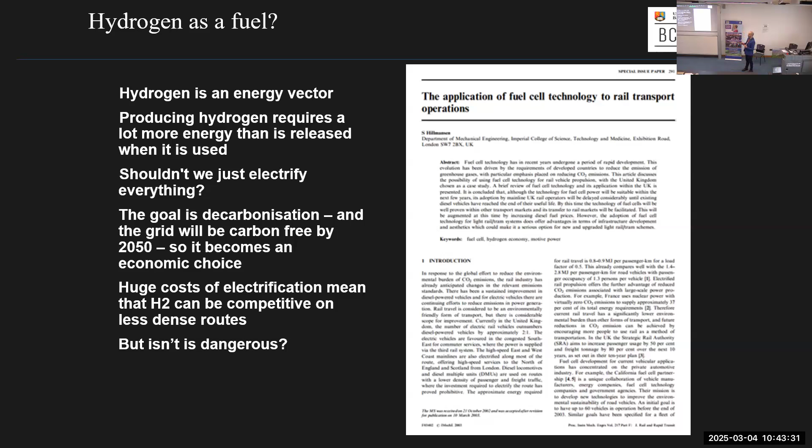I started thinking about this in early 2000, was at Imperial College, and I wrote a paper on application of fuel cell technology to rail transport, and looked at how it can be used as a fuel for railways. So as Maggie said, today is more about how we move the stuff around using freight, but our focus up until this has been using it as a fuel to power trains.

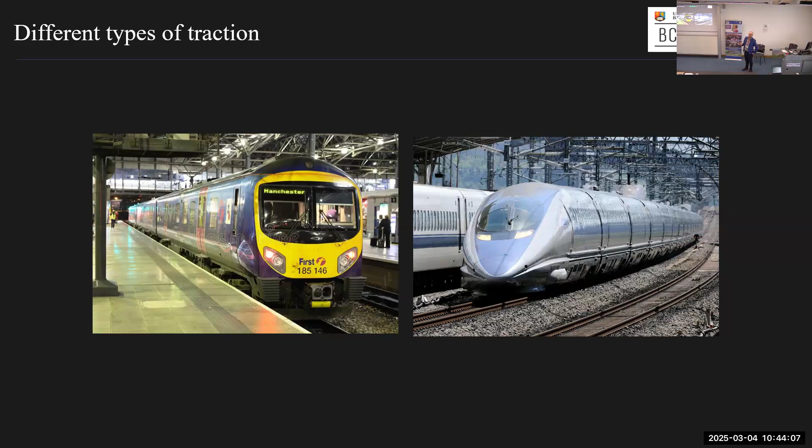There's very different types of traction on the mainline network, and freight too. I haven't got a freight picture here, but it shows a DMU style service and a high speed service. There's no way you can run high speed services using hydrogen - they're too powerful and go a long way, using too much energy. You'd end up filling the whole train with hydrogen and have no room for passengers to run at the energy levels they need. However, lighter trains with lower power duty cycles are suitable for hydrogen.

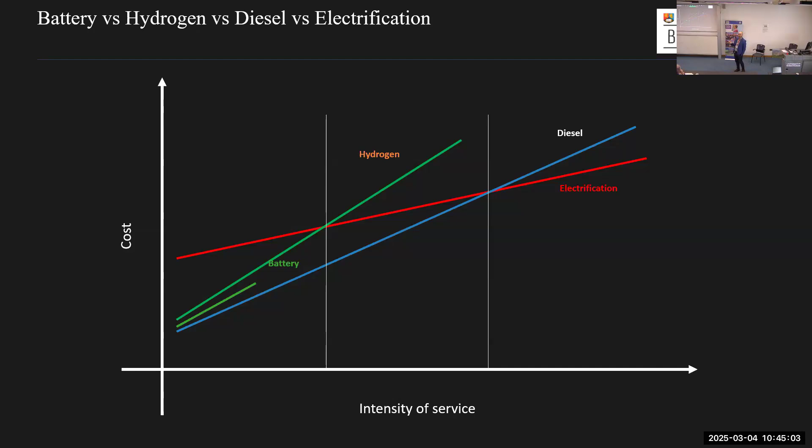I made this graph up a while ago showing where we could look at hydrogen. With the scales, this is terrible if you're a physicist - I was a physicist - there's no scales on the graph or anything. But the x-axis sort of represents intensity of service. Where you've got very intense routes, the obvious choice is competition between diesel and electrification, and electrification should be cheaper for intense services. Then at low intensity services, there's competition between diesel, battery and hydrogen, and electrification will be too expensive - you'd never justify it on economic terms. Somewhere in the middle, hydrogen can definitely get you further than the battery train, and that's where we think using hydrogen for propulsion makes sense.

Like I said, the engineering is long established, and we can move this stuff around safely, and there's a great deal of understanding about how hydrogen should be used.

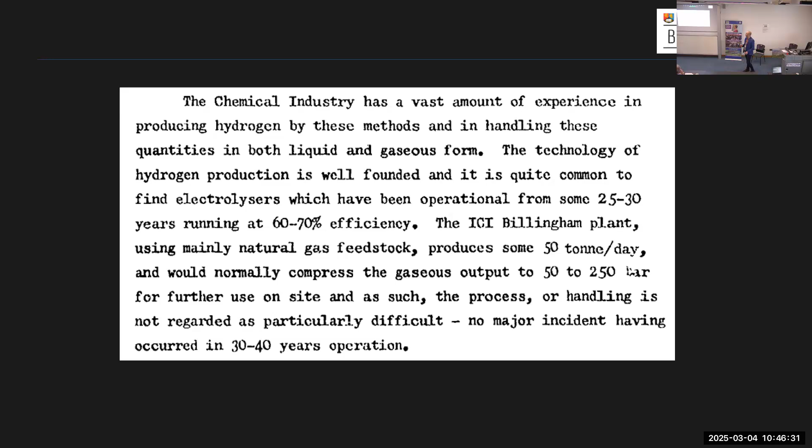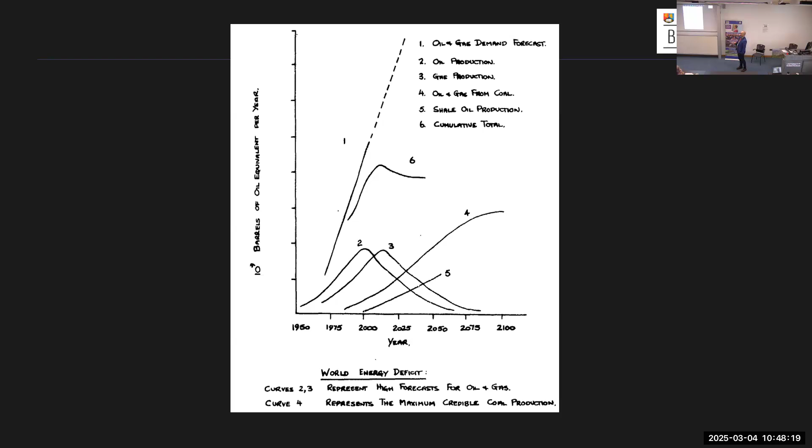I guess some sites are peaking. The sort of things you'll hear when you talk about hydrogen - some people say it's the most abundant element in the universe, that's true. Hydrogen has fantastic energy density, that's why we're considering using it for fuel - it's the thing that gets rockets into space and so on. When you can have it in liquid form particularly, it's a fantastic energy carrier, and we can make hydrogen through a range of means, including by us - there's a hydrogen test you can do on your breath, if there's a certain medical condition, I think it might be lactose intolerance or something.

If you're lactose intolerant, you have little bacteria in your gut which belch out hydrogen, so you can detect it. We produce hydrogen as well, but not very much of it.

There's a volume problem with hydrogen because it is very light as a gas. 1 kilogram of it at standard temperature and pressure would take up about 10 cubic meters. So it's about 1/10 the density of air, and even in liquid form, it's about 1/10 the density of water or thereabouts. So we have a volume issue, not a mass issue.

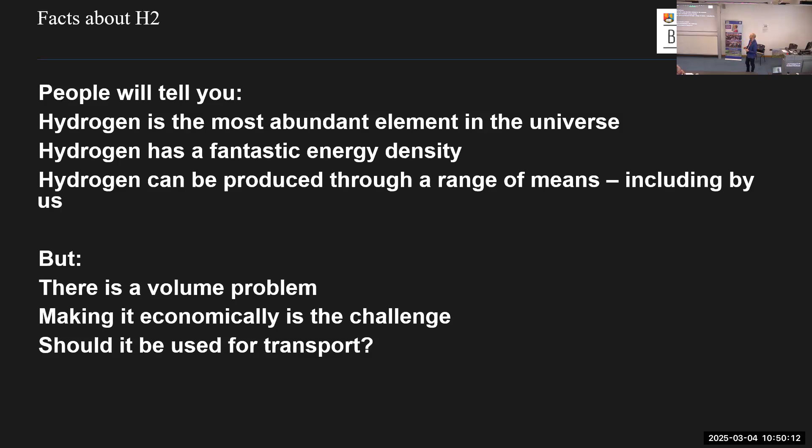Making it economically is a challenge here. Some people say if you're producing hydrogen in a green way, should you use it for transport? But this is maybe where the rail freight industry comes in, because you don't really care what your customers are using the hydrogen for. If it's going into making more effective use of steel or something in the steel process, then that's okay as well.

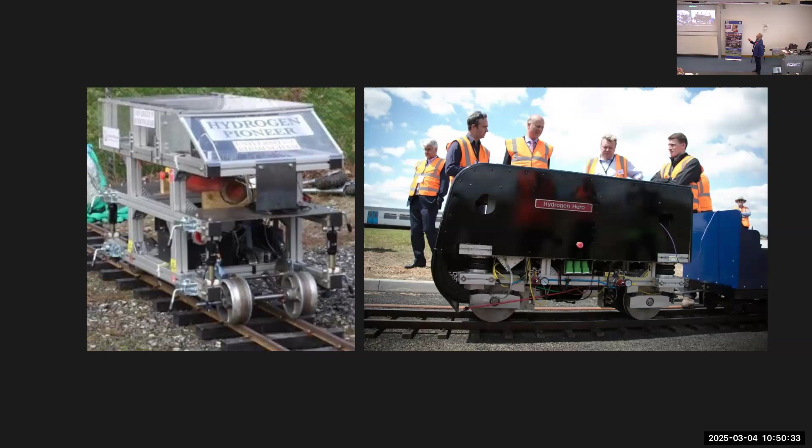So when we've looked into this, we've done some projects on hydrogen trains. That was me when I had more hair, with the Secretary of State for Transport, about 3 or 4 years ago. That's Chris Grayling, and we introduced the Hydrogen Hero train to him.

That led on to the work we've done with Porterbrook. I'm sure you know about this, and Helen's here as well—she's going to speak later about barriers to the introduction of hydrogen. What we did for that was strip out the motor car and put all the equipment inside the motor car to demonstrate that it would work. So it's evolved since then.

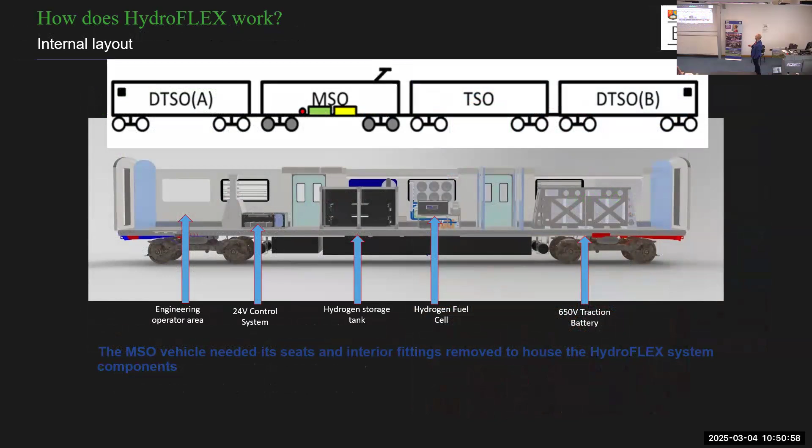We ran to Evesham and back, and since then the second version of Hydroflex runs around the network a lot. It's code number 799001, I think. If you Google it, there's loads of YouTube clips of it running about without using pantograph.

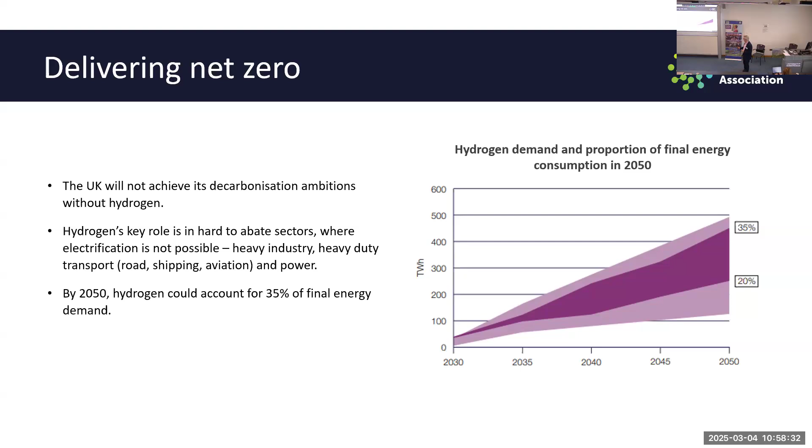As I mentioned, it can be used in a whole range of industries - steel making, chemical production, and even fuel production. The aviation sector and the marine sector are looking at sustainable aviation fuels, and hydrogen is a key feedstock to production of sustainable aviation fuels. Equally, the marine sector are looking at things like green ammonia and green methanol, and hydrogen is a feedstock to producing those kinds of fuels. Steel making as well, hydrogen has a key role to play, and as you'll see later on, in power generation too. Also it's produced in industrial heat applications, so there's a number of applications.

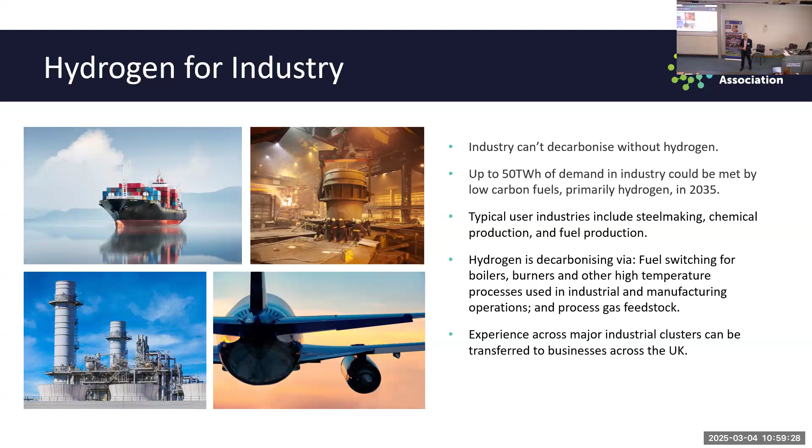There are a number of projects active in the UK at the moment where they're looking at switching from natural gas to hydrogen for industrial heat - in cement manufacture, in asphalt production, and even whiskey distilleries in Scotland.

Hydrogen also has a role in power generation in terms of producing and delivering energy resilience. As we put more and more renewables onto the system, those renewables are intermittent, so we need something to balance and manage that intermittency.

One of the good things often talked about is you could use excess renewable power to produce hydrogen and store it. It's a good long-term storage solution. Battery technology is equally advancing, but the thing about hydrogen is once you store it, you can store it for months or years, potentially as compressed gas.

You can see from the slide that it's common for renewables to get curtailed. That costs money, and that money ends up with electricity and power consumers paying. Hydrogen potentially offers a solution to make savings in that space.

The NESO Clean Power Report for 2030 clearly identifies hydrogen as a dispatchable, low carbon technology, and also refers to needing somewhere between 4 and 6 gigawatts of long duration energy storage. So again, there'll be a role for hydrogen in this space too.

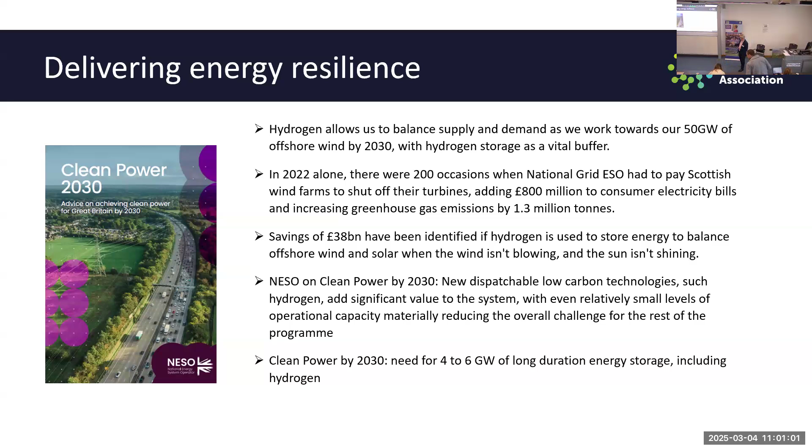Hydrogen will also deliver economic growth and jobs. There's a global demand for hydrogen technology that's expected to increase to about 700 billion by 2050. If we, as an economy, get a share of that, it's going to have a great impact on the economy and for jobs.

There are a number of major clusters emerging in the UK around Teesside, the northwest, Humberside and Scotland, and those could be the first start of that economic growth and those jobs. We also have a long history in oil and gas and expertise that could be transferred from that sector into hydrogen development.

So what does the market look like today? Stuart already mentioned that we've been producing hydrogen for a while. The Billingham plant actually came online in 1936, so for nearly 90 years we've been producing and supplying hydrogen in the UK. So hydrogen is not new.

We currently have capacity to produce nearly 790,000 tonnes of hydrogen a year, with round about 570,000 tonnes a year of actual production in the UK. But the vast majority of that is produced from natural gas, split over a catalyst to produce hydrogen and CO2. Clearly, we don't want to do that going forward.

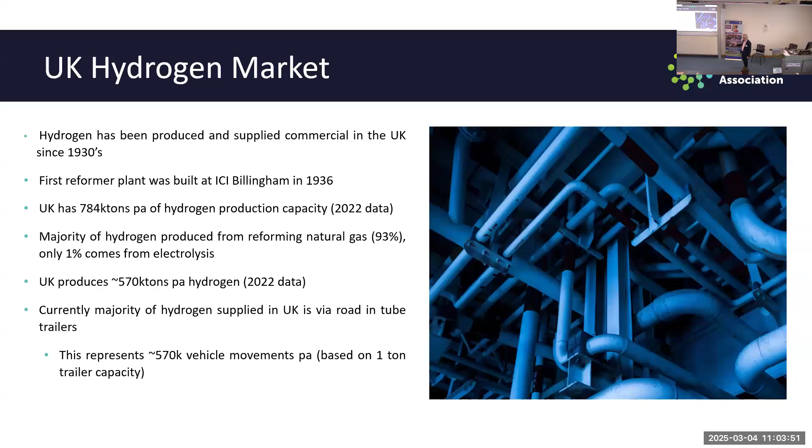So it has a role to play currently. What's going to happen in the future? This UK hydrogen project map has been created and is updated by the Hydrogen Energy Association to capture where the main activity is going on in the UK.

We have over 70 low carbon hydrogen production projects, post-FEED, captured on here. The green circles are electrolytic green hydrogen, the blue ones are blue hydrogen, using natural gas with the CO2 captured. There's nuclear too, so it's not just hydrogen production on here, there's also end use applications around hydrogen for transport, and hydrogen for commercial and industrial applications. We're trying to capture everything in this, and keep it updated as an association. There's a link on the slide there to the map.

So you can go in and interrogate it, and there's information on each of the individual dots that are on the map there.

This is likely to grow. I don't know if many of you are aware that the UK government has an incentive scheme in place called the Hydrogen Production Business Model, a contract for difference scheme which supports early stage green hydrogen production projects. We've had one round of this. The industry is currently waiting on the short list of projects for the second allocation, and there was something like 87 applications put into that. So this might be the picture at the moment of projects we know about, but there are a whole load of others out there that are going to end up going on this map. So this is only going to grow out to hopefully the numbers they're forecasting from the earlier slide.

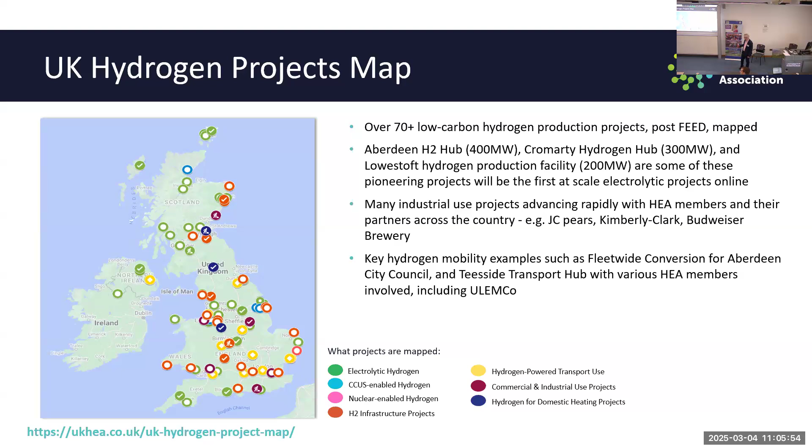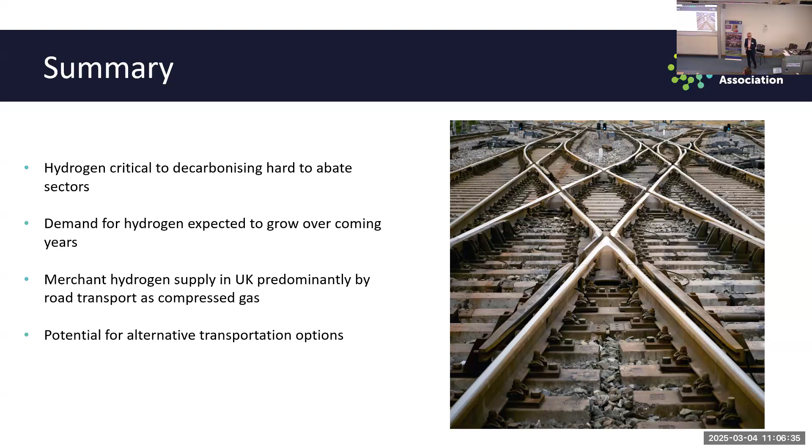So just in summary, hydrogen has a critical role to play in decarbonising our hard to abate sectors. It's one of the things in our toolkit to achieve our net zero targets. Demand for hydrogen is expected to grow over the coming years for various reasons: production of sustainable aviation fuels, decarbonising steel. But the majority of merchant hydrogen supplied at the moment in the UK is via road transport as compressed gas. So there must be the potential for some other alternative transport options to consider. So I'll stop there.

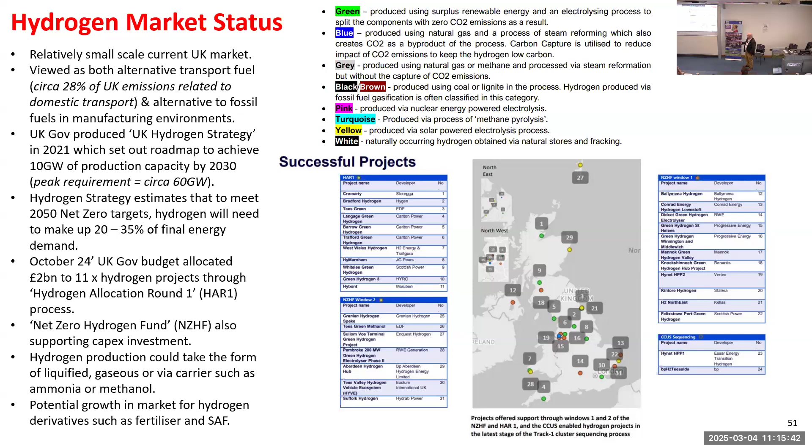The top rainbow, slightly obscure, but that's just to say there are different types of hydrogen in terms of the hydrogen rainbow, and it's primarily driven around how they're actually produced. So, as Andrew said, at the moment the majority of hydrogen we produce is grey, meaning we're not capturing the carbon, so it's not particularly green. If you do capture the carbon, it's blue, and if you do it in a sustainable manner, it's green. Anything else is either not so great, in terms of black and brown, or done by a different method.

Notwithstanding Ralph's point made previously, in terms of numbers, the point of showing this is really to highlight two of the different options and how you might move hydrogen by rail. So broadly, there's two solutions: bulk and intermodal. Bulk is where typically we have a producer who had a direct connection to the rail network, or the ability to connect to a nearby one. The intermodal solution is where potentially you'd be looking at using a bulk container, similar to the one we saw previously.

For moving liquefied natural gas, the idea is we take it to an established railhead for onward movement, and then subsequent movement by road as well. In the bulk solution, you'd be using a traditional tanker wagon to take it directly.

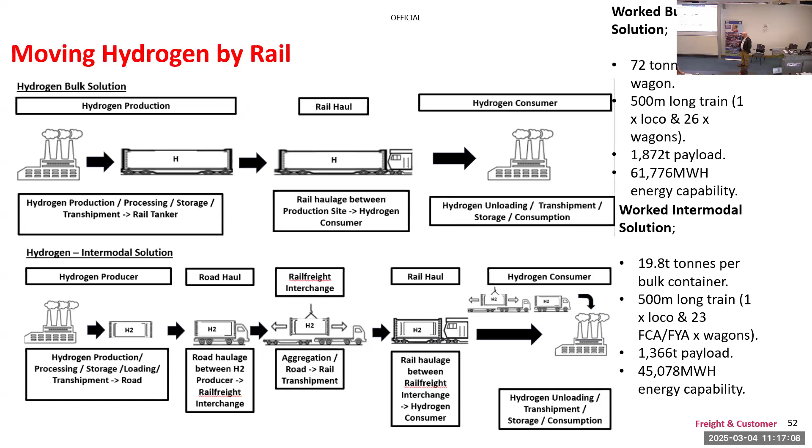The numbers on the right are very, very crude, so I'll caveat that before anyone says anything. But really it's to highlight what might be potential in terms of a typical consist. There needs to be further work on how you do conversions in terms of taking it from gas to liquid and what that means. The megawatt hours energy capability was based on a very crude analogy - I think it's for every ton of hydrogen you produce, 33 megawatts capability, something along that line. It's an idea there of the type of way that you might use it.

So, progress to date - on the left you'll see the market digest. I mentioned at the very start that one of my jobs is ultimately to be market intelligence, speaking with the industry to understand where it's at. Just before Christmas we published one that I've written on the new energies market - hydrogen, carbon capture utilisation and storage, and sustainable aviation fuel. The purpose of the document was ultimately to speak with the industry, understand the potential for rail, understand some of the potential barriers and challenges, and set out a number of actions that Network Rail could do in conjunction with the industry to progress the discussion. A number of you in the room contributed to it, so thank you very much.

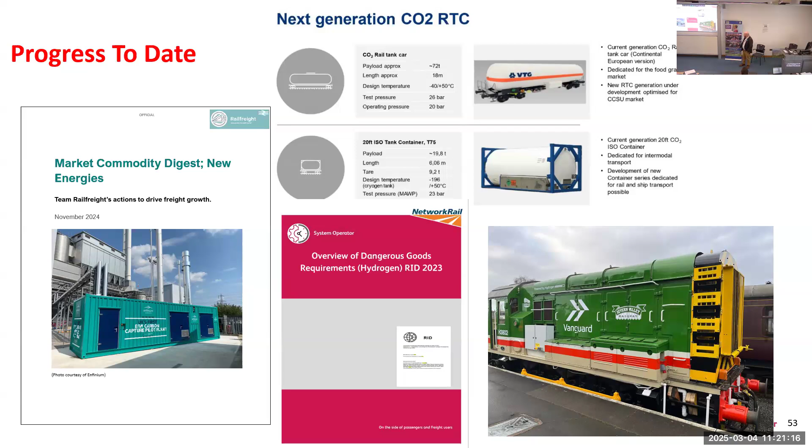If the market suddenly takes off and it does become a scalable thing, we need to be careful we're not trying to play too much catch-up with that, because otherwise we potentially miss the opportunity. Equally, there's a challenge that if we can't provide some kind of assurance for any of the new energies commodities that rail can actually do it - not just somebody up here saying it - the risk is that they'll develop something else, or it won't happen at all.

Investment is clearly key, not just in terms of the non-rail elements, the hydrogen production facilities and everything that goes with that, but clearly if you're ordering new wagons, bulk containers, locomotives, people, investing in terminals, there is a price to that as well. And also, if you're looking to connect a new facility, clearly there's a sizable price tag to that as well.

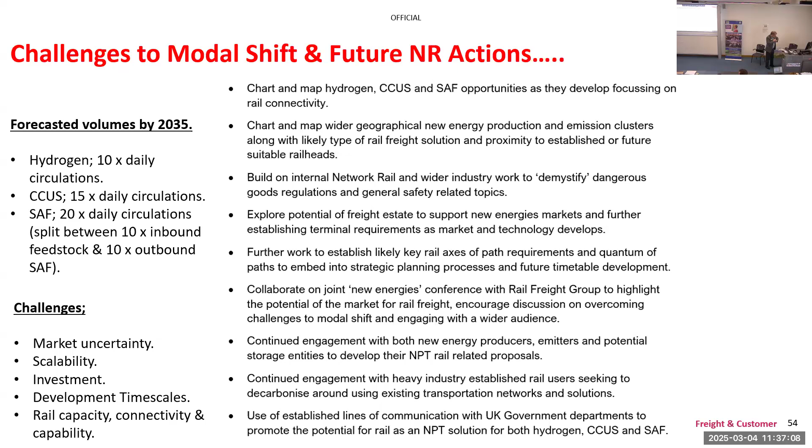Hello, can you hear me? Oh, right, good. Okay, nice, thank you. Right, okay, well, thanks for hearing me out today.

I just want to talk to you briefly about the different free ports around the UK. Coincidentally, the vast majority of them have either got hydrogen developments taking place either within the free ports or just outside their hinterlands, so there's a lot of inland production as well. You might think, how does East Midlands qualify for a free port? Well, that's because East Midlands Airport is the UK's third largest freight airport after Heathrow and Stansted, and it's actually the largest airport which accommodates pure freighter aircraft. So that's why it was chosen by a chap called Rishi Sunak long before he became Prime Minister, who set up the Free Ports Initiative.

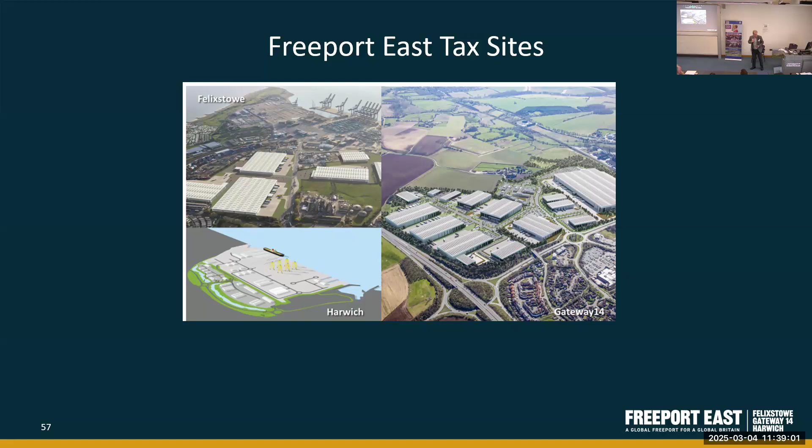I'm not going to go through this in great detail as we're going to be sharing the slides, but effectively you get 100% tax relief if you've got any investment located on a free port. You don't pay business rates for 5 years, as long as the company first becomes liable by the 30th of September. But the crucial thing is that the free ports and their hinterlands, public and private sector owners, can actually use this money for economic regeneration. We're also challenged with promoting the low carbon economy, clean energy and innovation, which is one of the reasons why I have a job for 3 days a week. So these are the incentives, available in all of the free ports that I mentioned.

There's one on the Humber, ABP, I think they're here, and they're quite prominent in that. There's another one on Teesside, PD Ports again on the attendee list. Now, the important thing to recognise is that we don't own the land. We administer on behalf of the government the tax site benefits. But at the end of the day, it's up to an occupier to come to a commercial agreement with the landowner. That's quite important because one of the things the government were keen to do with free ports is encourage investment where it wasn't previously coming to the UK - in other words, using it as an incentive, a policy lever. You don't want somebody who's cheesed off with their landlord in Nottingham just moving up the road to Derby or anything like that.

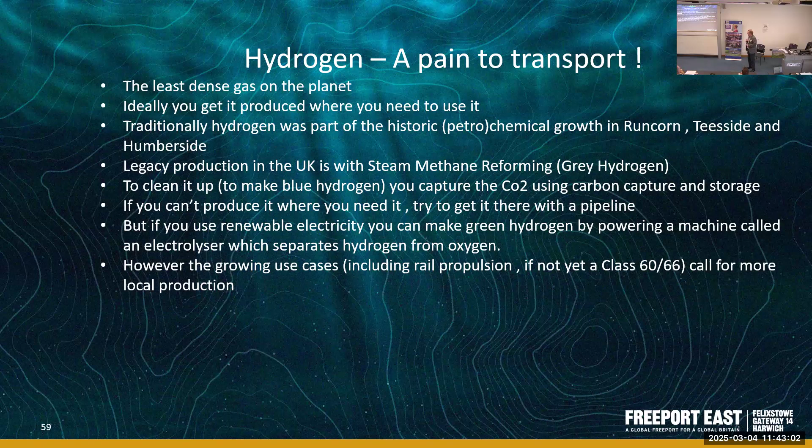But there are growing use cases, and that's what really got the east of England excited about hydrogen, because we don't have legacy production, we don't have a petrochemical cluster, we don't have any steel making, we don't have any paper making, we don't have any glass making. We've got some very nice pubs, we've got some thatched cottages, we've got a dirty great container port, and we've got an existing nuclear power station and one being built that wants to be Britain's biggest green building site.

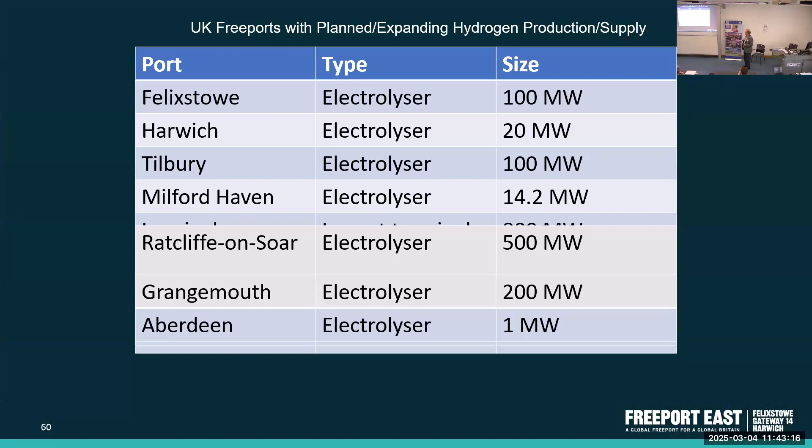So this just gives you an indication of the free ports, the electrolyser developments under development in the various free ports. That's not an exclusive list, but I'm not very good at drawing maps.

People are planning at the moment for blending hydrogen with methane. Everybody thinks it should work theoretically, but it's a question of going from the theoretical to the practical, and nobody wants to sign the piece of paper. The government is supposed to take a view later this year on trials of a 20% hydrogen blend with methane to see how things get on.

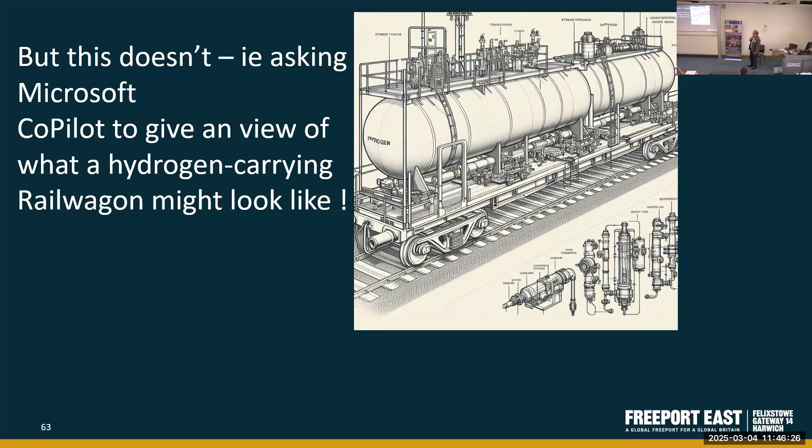But this doesn't. This is what happens when you ask AI, okay, what does a hydrogen wagon look like? And I got some very interesting responses. I got somebody saying, oh, well, we can't find a picture of a hydrogen wagon, but here's an ammonia carrying wagon, and you can separate the hydrogen from the nitrogen in ammonia, and then you've got hydrogen. So I don't know where it found this, whether it just nicked some graduate's design from a piece of work or something. But anyway, that gives you an indication of the challenge.

Now, this exists in reality. We've spoken about tube trailers. Approximately, if you want to carry a ton of gaseous hydrogen at 350 bar, that will cost you the best part of £1 million.

Smaller trailers are available, and to give you an indication, if you had the ScottishPower Renewables electrolyser in the port of Felixstowe working at full tilt, which is 100 megawatts, you're going to need 44 trucks a day if you haven't got a pipeline or a railway of moving the hydrogen out of the site.

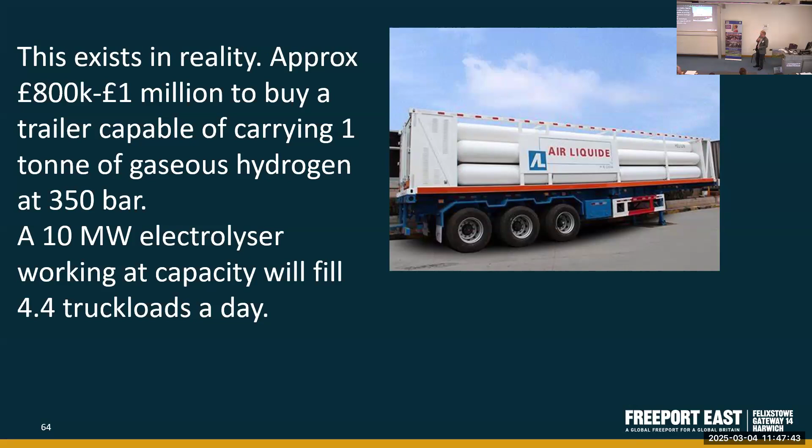Obviously, some of that is going to be used within the port of Felixstowe. They're looking at decarbonising port vehicles, but you do have a challenge at the moment, certainly in our part of the world, because we don't really have the land to build a sustainable aviation fuel plant or a methanol plant, as we don't have the legacy expertise or land to do so. We could probably choose a few thatched cottage owners, but not really worth it at the moment.

We do have an Australian inward investor in Freeport East who uses a byproduct from the iron ore mining process to manufacture a smart sponge, or what you call in scientific language, metal organic frameworks.

What they are working on in Harwich at the moment is finding ways of building tanks that can carry hydrogen at 50 bar pressure. Because obviously, if you have to pressurise the hydrogen at 350 or 700 bar, you need to get a compressor operating. There's capital costs involved there, and there are energy costs as well as financial costs to do that.

So they've been quite successful at the moment in the marine sector. They're doing a couple of trials, one of which is powering with hydrogen a generator in some of the smaller ports around the UK that don't have enough grid connectivity to run ship systems while they're in harbour. Another one is actually going back to steam engines for work boats.

The sort of things used on the wind farm support boat, they're actually working with a company who's developed a steam turbine powered by hydrogen. So we're actually going back to steamships, probably about just over 100 years after the last steamship stopped sailing between Harwich and the Hook of Holland.

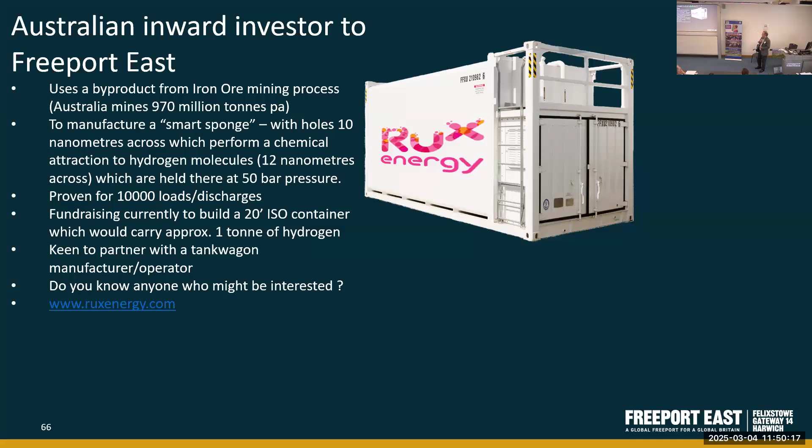But obviously there's one thing coming up with an idea and there's another thing talking to people who know how to make them. So, declaring interest, I work for RUX for two days a week as well as a UK Business Development Manager, but we work quite closely with them. So that's pretty well everything. Thank you for your time, and I look forward to any questions.

Thank you very much, Robert. There are some people in the room who make tank containers. Excellent. We have them make tank containers. Don't be shy, Greenbrier and VTG, you know, tank wagons, sorry. Oh yeah, it would be interesting having a chat with you. I've been reading about what you're going to do with Deutsche Bahn and toluene.

Yeah, so that's brilliant. So just before I let you go, tell us a little bit - you've got a green corridor with East Midlands. Yes, we have. Tell us a little bit about that.

Well, basically what it is, there's probably about 6,000 trucks a day going into the East Midlands from the port of Felixstowe, and probably the best part of 10 trains a day taking containers to Daventry and East Midlands Gateway. What we're trying to look at is the cleanest way of moving those containers into the East Midlands. So hydrogen has got a role, electrification has got a role as far as rail is concerned, and we're also looking at hydrogenisation.

There's a project called Highball, which you may have heard of, which will actually subsidise the lease for operators of vehicles who want to lease a pure hydrogen truck. The first ones will be coming on the market probably later this year - I think Scania and Mercedes will be launching them. That will subsidise their lease by about 80% for 5 years. So if you're a haulier and you're interested, or if you're a rail freight operator with haulage operations and you're interested in getting a subsidised lease to see how you get on with the hydrogen vehicle.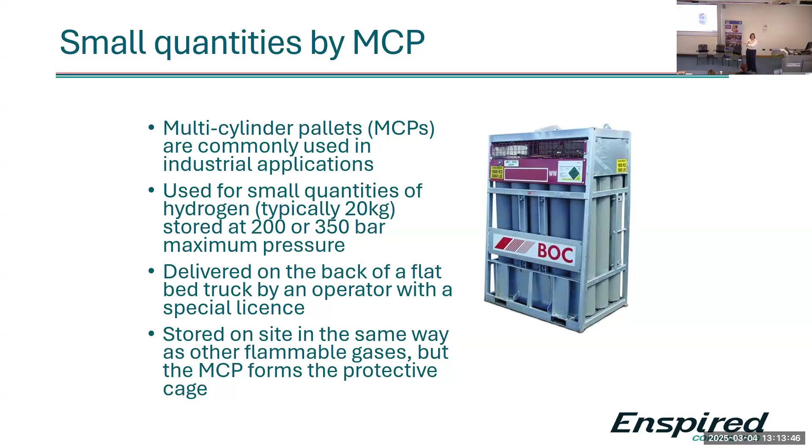These are commonly used in industrial applications. They take typically around 20 kilograms, really small quantities, but are quite useful for transporting it, as compressed gas storage at 200 or 350 bar. They're delivered to your site wherever you want them, on the back of a flatbed truck, and the operator needs a special licence to do that. But that's really common practice, and you'll see those going around on the road network today. You store them on site in the same way as other common gases, but the MCP forms the cage structure, so you don't need a specialist compound.

The other one that got mentioned today was road transport by tube trailer. So this is a photo of the tube trailer that's used to fuel hydroflex, and inside that it looks just like a normal road lorry. You wouldn't really know other than the giant hydrogen label on the side what's inside it.

But inside there are a series of those tubes, those high pressure cylinders. This one can store up to 350 bar. It's commonly going up to 700 bar now in the automotive sector. So we're seeing a lot more of these, even though they've got quite a high price tag that was mentioned earlier. This one gets about 300 kilograms of useful hydrogen off it using the decant mechanism, but they can go up to more, which was mentioned earlier.

So there's a variety of these. These get transported by specialist road hauliers. The project that we're going to do within the UK is going to look at taking one of these and going directly onto the flatbed wagons, or what would we need to do from an innovative wagon. So what are the steps we need to consider?

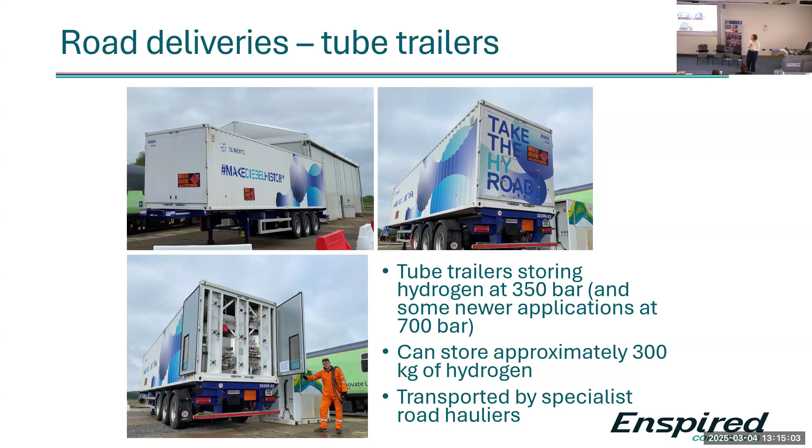The next thing that's coming, we haven't mentioned very much at all, is liquid hydrogen. There's not very much of this in the UK at all at the moment. It's used a little bit in industrial process applications. It's got a much better energy density than hydrogen. So somebody else asked a question about the density and whether it's worth even transporting gaseous hydrogen. This is where liquid hydrogen comes in.

The disadvantage is the boiling point of hydrogen is very, very cold. So it's stored in big tanks, and those tanks are thermally insulated for transportation. That means you've got to consider things like boil off, because at some point you will lose some through evaporation, so the tank has to be capable of dealing with that.

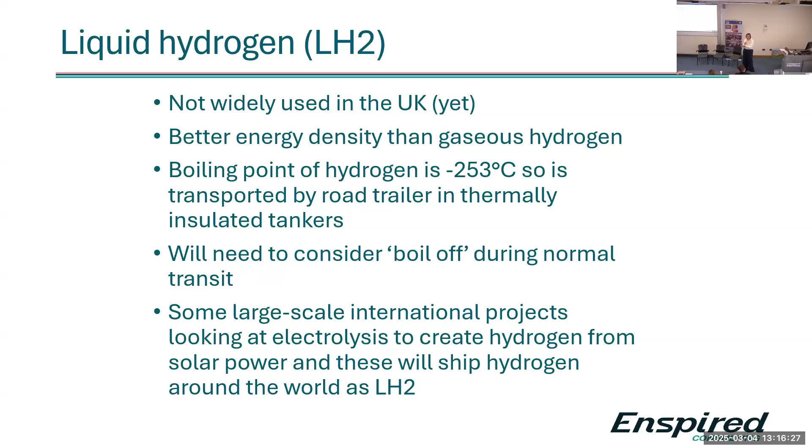The interesting bit for the room today, I guess, is that there are some really large-scale industrial projects, international projects, looking at electrolysis of green hydrogen, particularly in the Middle East. And then those companies are looking to transport using liquid hydrogen through shipping around import/export. So I guess we're not here yet, but this might be worth looking at in the next 5 years or so as the industry develops. As hydrogen develops, and all the things we've heard about this morning, this is going to come as the next thing, I think.

If you're going to transport hydrogen, don't put it in an airship, which is covered in a flammable fabric and coated in a lacquer that catches fire. The Hindenburg was caused by a lightning strike catching fire to a flammable coating on the airship. So the first thing is, that's not really relevant to us because the flames weren't from the hydrogen there. So that's the first thing to say.

Having said that, you do need to think really carefully about flammability and explosion risk with hydrogen. Hydrogen has a lower flammability limit of around 4%, that's a 4% concentration. That's typically when it starts to become flammable. And it's explosive somewhere between 17 and 18%. Now the 4% isn't too difficult to manage because there are some other gases that we're all familiar with that are flammable around 6%, so that's not too different from other gases you're more familiar with.

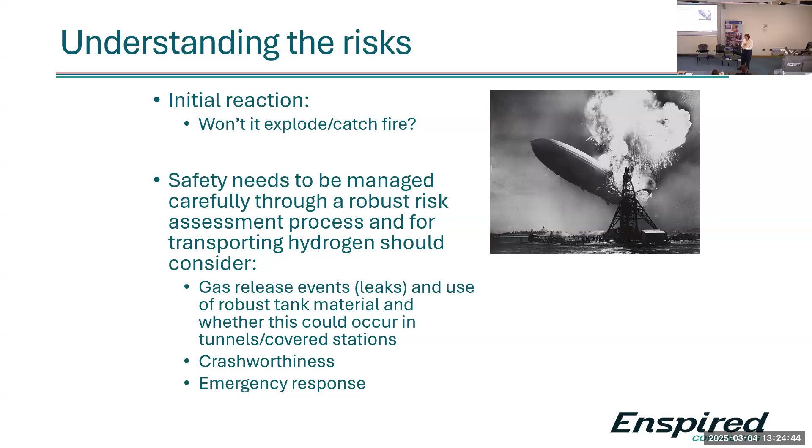So I think you need to go through a full risk assessment, and the next one is we already do dangerous goods, as I mentioned before. Those are the bits you will look on our RSSB website, the relevant standards and things. But the process needs to be followed for any new freight flows. If we're doing new container types or new wagon types, if hydrogen is new to a particular operator - you've never as an operator carried hydrogen before - then you have to follow the process.

And the process basically says do a risk assessment, think about safety, think about all those things we've just talked through, and document why what you're doing is safe, so you've got that safety justification.

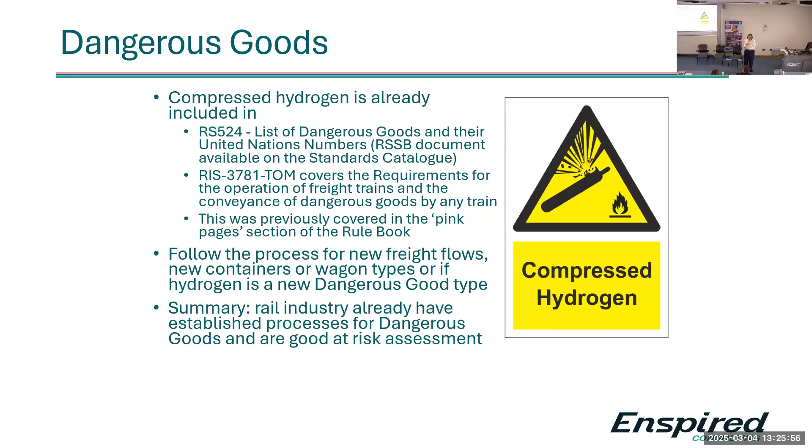And that's what I find powerful about this safety stuff - the rail industry is really good at this. We're really good at doing risk assessments, we do them all the time, we think about risk in the right way. We've got processes and standards that allow us to follow these things. We already have a dangerous goods process that calls up a risk assessment process, so we're in the right way of thinking about this. This is not impossible, it just needs thinking about carefully.

So I think, look, I'll just leave you with the opportunities around modal shift. Hydrogen - I've heard a lot of growth statistics about the hydrogen economy, that's all coming to the UK. We can see it in other countries as well. We know this is coming. There's a modal shift opportunity to put some of that road traffic for the tube trailers onto rail.

And maybe we want some containers, purpose-built containers in the longer run if the market is there to serve that. We're already connected to major ports, so if we're importing hydrogen from other sectors and liquid hydrogen is coming in at ports, they're all rail connected anyway. We've got a lot of good connections for a lot of the sites that were on those maps this morning.

There's an increasing demand, and we've got an opportunity to demonstrate our value to the oil and gas sector. And the moment to demonstrate is coming up fairly soon, isn't it? It's great to have this conference today because we're starting that process of collecting our pitch as rail to the oil and gas sector. So we're not in competition with each other, we're in competition with other sectors.